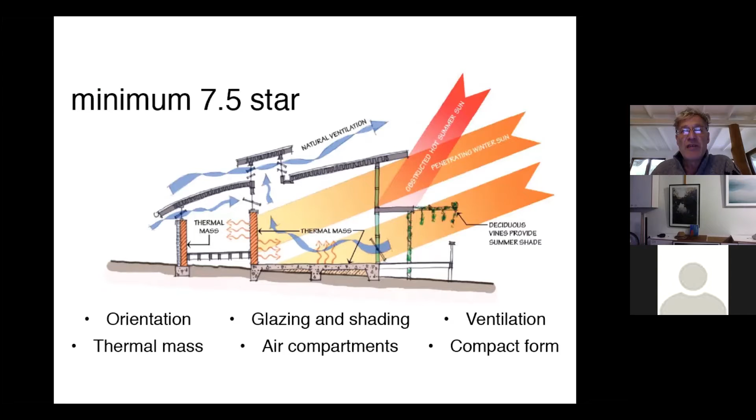If I just quickly take you back to that scale, you could see, so if you're targeting 7.5, you're going down 1.5, it nearly doubles the energy used in a year to heat and cool a home.

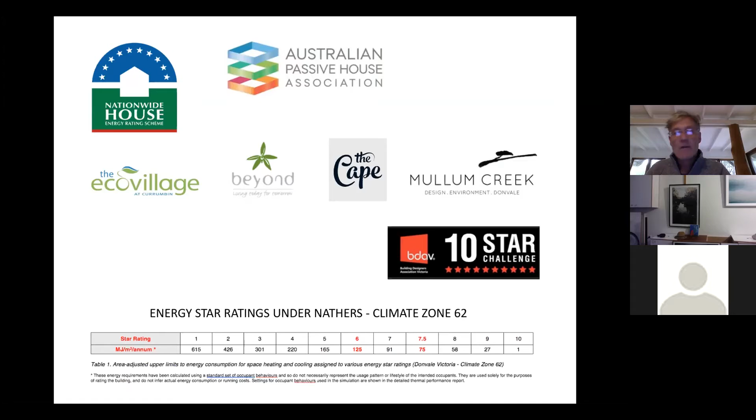So this weakness in the system can be addressed with a few relatively simple measures, which we employed for the Mullum Creek Eco Housing Project in Donvale, which is an outer suburb of Melbourne. We required that energy ratings to 7.5 star be undertaken using AccuRate, and that be done by one nominated independent rigorous assessor for all homes across the estate that the developer nominated.

And once construction was underway, we provided lot owners with a free inspection service to ensure that the thermal performance that was designed into the home was actually carried through to the final constructed outcome. Both energy assessments and construction overview were generously funded by the developer, which is a family of environmental philanthropists, Sue, Steve, and Danny Matthews.

In cool temperate climates like Melbourne, it's not actually that easy to achieve a genuine 7.5 star energy rating, which Stefan and many other terrific architects discovered. So that's the thermal performance that almost halves the space heating and cooling requirement attached to the nationally mandated 6-star minimum. We found that homes with anything other than compact architectural form and a modest amount of well-oriented glazing struggled to reach 7.5 star without all of the following design features in place.

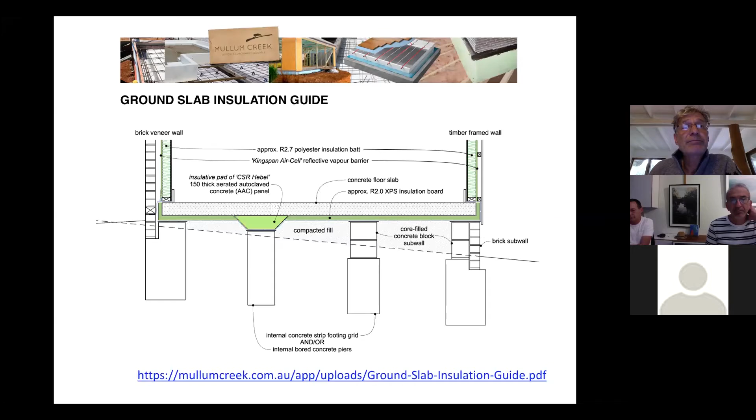As architects who declare, I suggest we focus on securing as-built, say, 7.5, 8-star homes. We should do that by teaming up with highly competent energy assessors who we beg to consult without fear or favour through the design, certification and construction phases of our projects. Better that than to cajole them towards a good look but low bang for buck and frankly unnecessary 10-star standard or target. Our energy assessors also need to be paid properly for the substantial work that goes into a truly rigorous service. Okay, so what about building materials, which is what I'm supposed to be talking about?

A report was tabled at the World Economic Forum in Davos in 2018, and it put the world's consumption of materials at above 100 billion tonnes a year, and that quadrupled since 1970, whilst population in that period only doubled. So between 2016 and 2018, just 2 years, this consumption had jumped by more than 8%, yet the reuse of materials had fallen from 9.1 to 8.6%. According to the CEO of Circle Economy, Harald Friedl, who tabled the report, "We risk global disaster if we continue to treat the world's resources as if they were unlimited."

Now, the lion's share of these materials, nearly 40%, is turned into housing alone, of all the materials that we draw from the planet. So the World Green Building Council also tells us of all global carbon emissions that are attributable to the built environment, 28% are embodied mainly in the procurement of materials used to construct them.

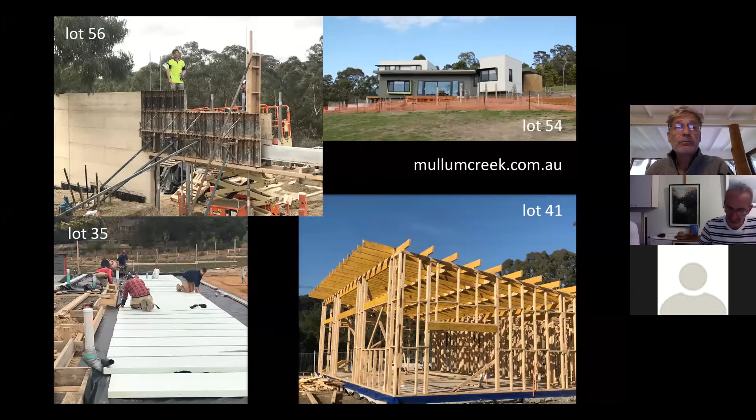But in this emergency, we could instead respond to a simple truth, and that's that the cement and concrete products, the steel, the fired clay products, the timber, and the swimming pools we discovered are currently the most impacting materials to be locked into our builds as they rise from the ground. A couple of thumbnail sums and a good dose of critical and future thinking go a long way in guiding our material specifications towards environmental and social responsibility.

So let's start with cement and concrete. The World Green Building Council, Beyond Zero Emissions, and other respectable sources agree that the manufacture of Portland cement alone, not all of concrete, just the cement that goes in, accounts for a whopping 8% of the planet's greenhouse gas emissions. So that's roughly the same as the entire transport sector. It's hard to believe, but it's true.

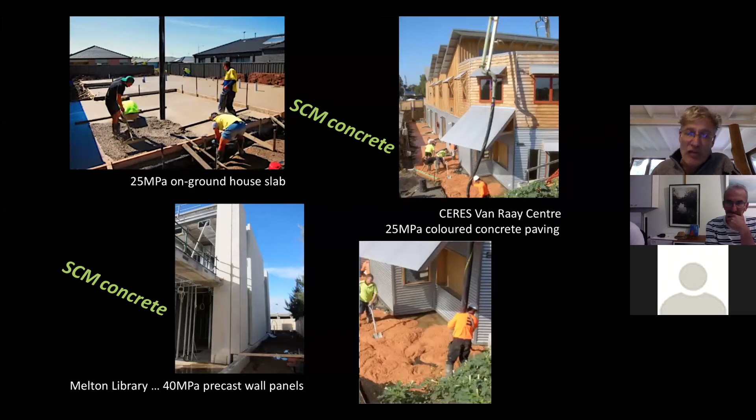But there are alternative, equally effective and readily available concrete binders, such as fly ash, which is a waste from coal-fired power generation, and slag, which is a byproduct from steel smelting. They're alternative binders, and they're collectively referred to as supplementary cementitious materials, or SCMs.

The Mullum Creek Design Guidelines required that SCMs make up a minimum 30% of the cement used in wet mix structural concrete. And some architects and engineers choose to increase that to around 60% where surface finish isn't critical. As construction commenced on the estate at Mullum Creek, we found that more and more local batching plants were supplying concrete with SCMs, with no increase to supply cost. In time, it should be considerably cheaper, we're told by these batchers, because slag and fly ash are problematic industrial wastes that are otherwise expensive to dispose of.

The initial resistance to SCMs subsided as concreters at Mullum Creek found ground slabs containing SCMs were stronger and with less shrinkage cracking, as the shotcrete sprayers learned not to add water so liberally to adjust the workability of the SCM mix on site, and as bricklayers and rammed earth wall contractors realised that bagged cement containing 50% SCM, such as Australian Builders Eco Blend, which is on the left of your screen, was equivalent to general purpose Portland cement in both performance and price.

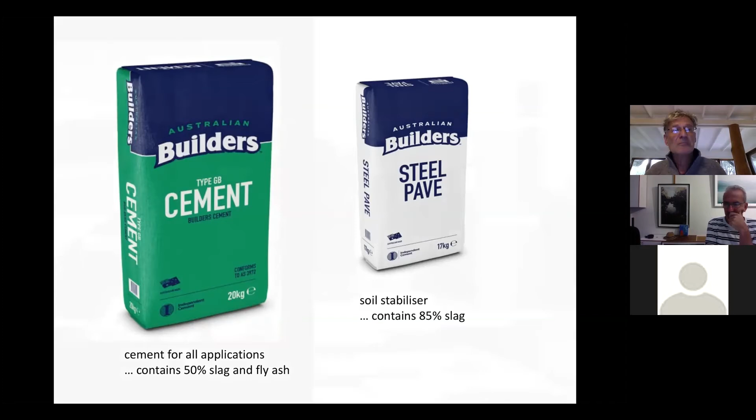The other week, I was on the phone with a bright young architect from Stefan's office. His name is Rodrigo Roca. He recalled someone, I think from Austria, telling him that rammed earth in Australia is not rammed earth, but rather just dirty concrete.

And he's right. There's certainly nothing environmentally responsible about building a 350mm thick rammed earth wall containing 10% Portland cement by volume. The mix for a 190mm thick hollow concrete block contains only 14% Portland cement, and the volume of material going into that wall is hugely less, so much less impacting than most of the rammed earth walls that are going up at the moment.

When I was a young bloke, we built a lot with rammed earth and puddled mud. We put effort into selecting and blending aggregate with the right gradation of particle size and colloidal content to achieve good strength and weatherability without the need for cement.

We followed the CSIRO National Building Technology Centre Bulletin 5 on earth wall construction, which is still not in print, but you can find it on the net. And we did the old-fashioned thing of erecting test panels before proceeding with each build.

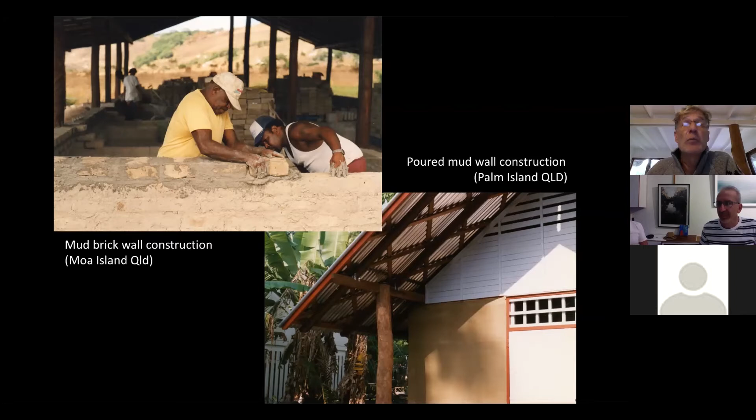What about steel? I think there's nothing wrong with a piece of corrugated iron. Profiled sheet steel for wall and roof cladding provides an expanse of robust and almost maintenance-free cover that's difficult to surpass at less than half a millimetre of material thickness.

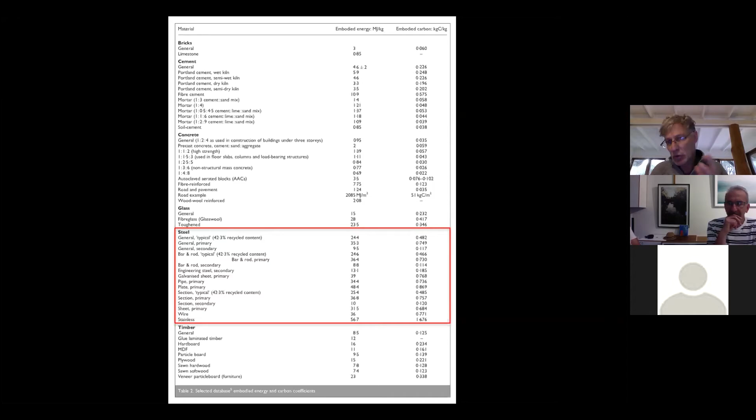You'll see steel is up around in excess of 10 times per unit weight. They have a similar density, but you'll see by per unit weight or volume, 10 times the embodied carbon and embodied energy that go into them. It's quite extraordinary.

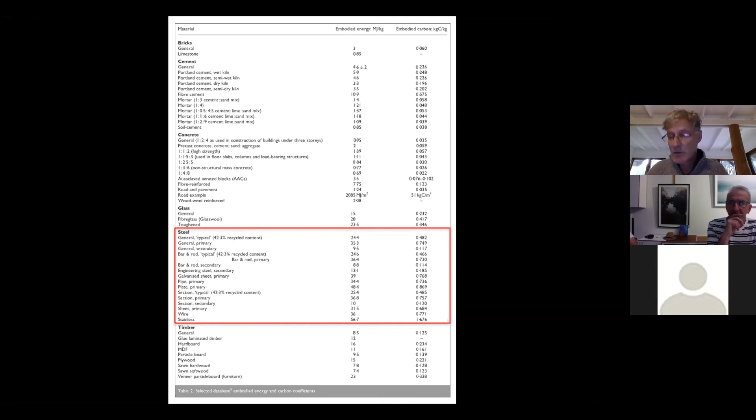In too many simple structures that I see, around the traps, I find there's steel used where substitution with a sustainably sourced timber would have been a cost-saving no-brainer. On some sites, it's almost obscene. These are architect-designed homes.

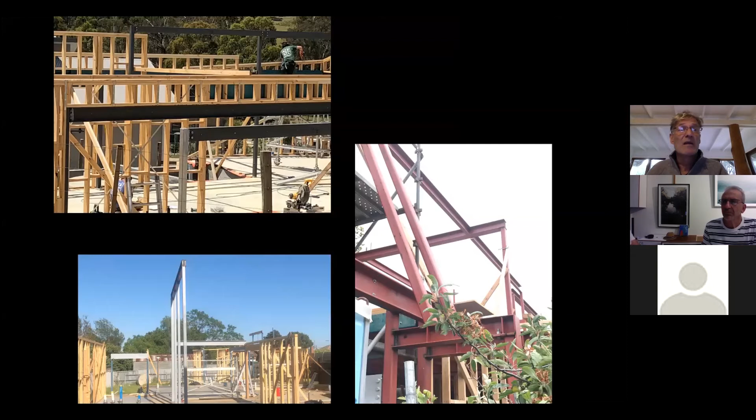The Mullum Creek Design Guidelines include a requirement that prohibits the use of cold-form steel framing, but the use of hot-rolled steel is permitted. I learned more recently, some years after we finalised the design guidelines for Mullum Creek, that the Currumbin Eco Village up in Queensland prohibited hot-rolled steel, and it did so without undue resistance. So in retrospect, I reckon we could have done this too.

Nonetheless, the Mullum Creek Steel Products Guide, which you can find on the Mullum Creek website, lists steel products that are manufactured locally via comparatively energy efficient ISO accredited processes. Our local eco-warrior, Joost Bakker, argues that steel is fully recyclable and so the ultimate framing timber.

When the day comes that global industry draws solely on recycled steel stock and renewable energy for its resmelting, I might look to agreeing with him. But until then, and it looks to me to be a long way off, this climate and biodiversity emergency must have us desperately seeking to minimise the amount of structural steel we shove into our buildings.

While working through some details for a reinforced concrete raft slab a while back, I did a few simple sums and I realised that its embodied carbon could be reduced by increasing slab thickness to allow a reduction in the gauge of slab mesh. And you'd think that to be counterintuitive, but such is the potency of embodied carbon in steel that we need to address.

We need to start questioning architecture on our drawing boards that relies on highly reinforced concrete and hot-rolled steel to stand up. We need to ask ourselves why such structurally demanding designs are necessary. Are we chasing building heights that are simply unsustainable, also by broader environmental and economic and social measure?

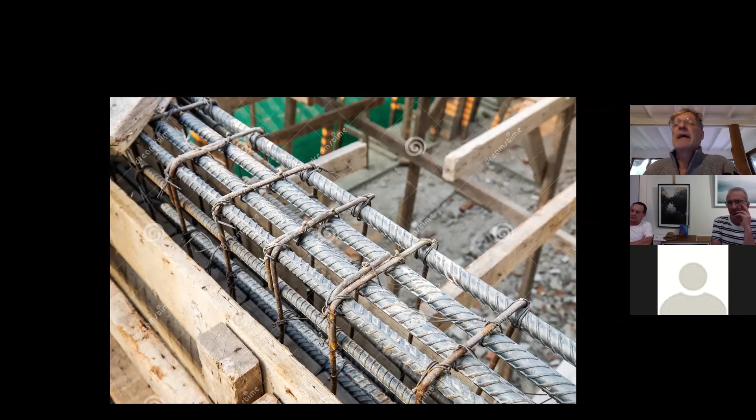Or has our architectural flair for gravity-defying cantilevers overtaken our responsibility to design light and lean in response to the emergency before us? What other less impacting materials could we use for these structures?

And that brings me to timber. You'll see this everywhere. Wood is good, end of story. Make it wood. Contrary to popular belief and some heavy marketing, timber can be the very best or the very worst material you will work with as an architect or a builder, depending on where and how it's sourced.

If it's sourced sensitively, it can store carbon through and beyond its service life in construction. It can be reused or recycled, or it can be harvested from deliberately planted and sensitively managed forest, helping to maintain healthy ecological processes, sequestering atmospheric carbon, and contributing to the social and economic well-being of rural communities.

But timber that's harvested insensitively can result in serious and irreversible impacts on flora and fauna, on soil health and waterways. It can reduce or even reverse a forest system's sequestration of atmospheric carbon, and it can erode the well-being of rural communities. There's lots you can read on this.

Even before our current bushfires commenced in September, deforestation was responsible for some 17% of global greenhouse gas emissions. And unfortunately, the bulk of structural and architectural timbers that we specify in Australia are sourced in ways that contribute directly and indirectly to this forest demise.

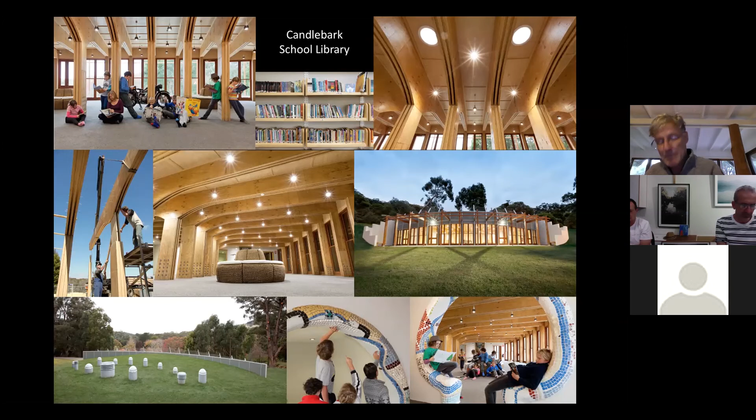The past 4 years, we've been able to extend the timber initiative of Mullum Creek into the launch of a new social enterprise called Ceres Fairwood. The profits from Ceres Fairwood go back into Ceres Community Environment Park, which people from Melbourne and the women on this webinar will probably know. It's a wonderful place in Brunswick.

Fairwood removes itself from the adversarial forest debate and from opaque environmental certification schemes. It aggregates and retails timbers inside short supply chains with tree farmers and portable sawmill operators who we know personally. They're mostly small producers who are geographically dispersed and struggle to find, sell and deliver to a market that fully appreciates the trees and the timber that we've got on offer.

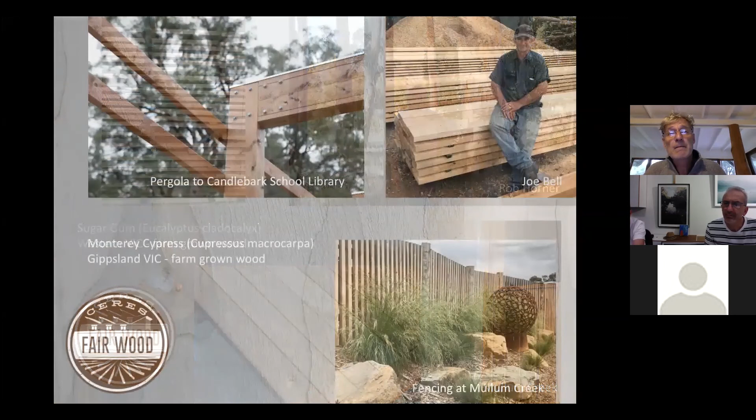Fairwood buys only from growers and millers who source wood to the highest standards of environmental and social responsibility, being informed by the Mullum Creek project. We share their stories directly with our customers, which are building and landscape contractors, furniture makers and DIYers. Fairwood builds direct friendships and understandings between city and country folk, and it encourages farming families to revegetate their bare paddocks with trees for conservation and for profit.

I'm in the process of writing a paper on timber for the AIA's Environment Design Guide, and once that's done, I'd be happy to present again to Architects Declare on this subject of timber.

For me, the only really disappointing thing about the Mullum Creek project was our failure to cap the scale of homes that were built there. There are some monster houses on the estate, and the peri-urban surrounds didn't exactly provide commercial courage for such a move, because there are lots of other big houses surrounding the estate.

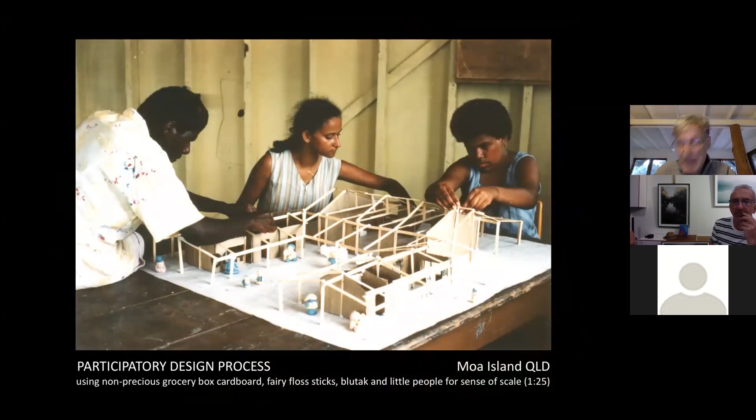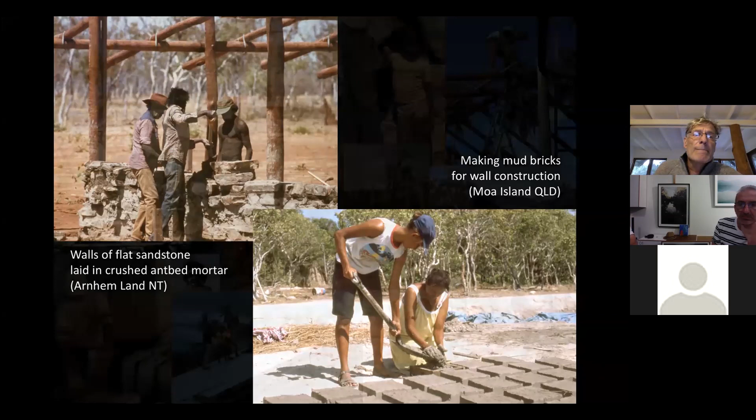This background brought me the courage to take a sidestep upon graduating as an architect, to live and work with rural and remote Aboriginal and Torres Strait Islander communities in support of their aims, to design their own homes in ways that were meaningful to them, to build their own homes using materials which were freely available in the local bush, and to adopt simple construction methods which were suited to the community workforce, which were men, women and children, all with vastly different levels of skill and energy.

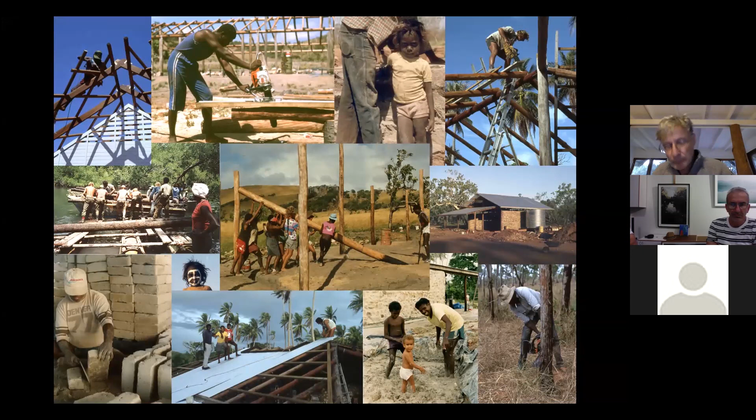Back in Victoria a decade later, I was able to follow my dreams. To reforest a degraded paddock in South Gippsland, to build an autonomous house in my spare time as I found the dosh to do it, to team up with neighbouring farmers and supporters from both the city and the bush to reforest our local valleys between Western Port Bay and the Bass Coast. We were able to plant 400,000 locally Indigenous trees and shrubs within a decade. That's what people power can do.

I was able to follow in my grandpa's footsteps and grow fruit and veggies for my family, our friends, and for organic retailers, CERES Fair Food, another social enterprise of CERES, and to Terra Madre. This place, and it's where I am now, it'll always be my laboratory for learning, and it'll be a lifelong joy. So to you young ones Zooming with us, I'd like to assure you that there are lots of fun ways to be an architect.

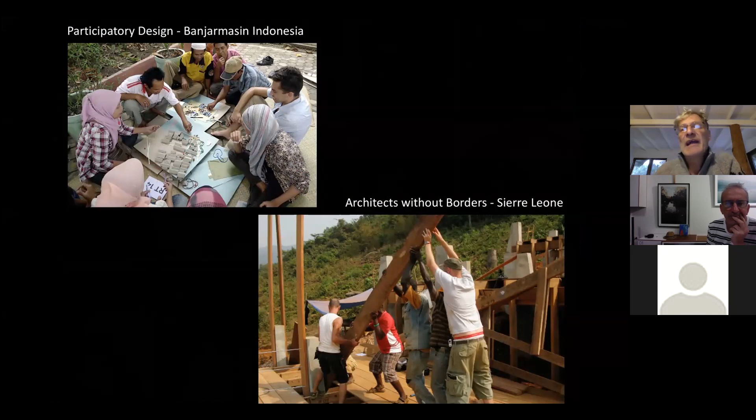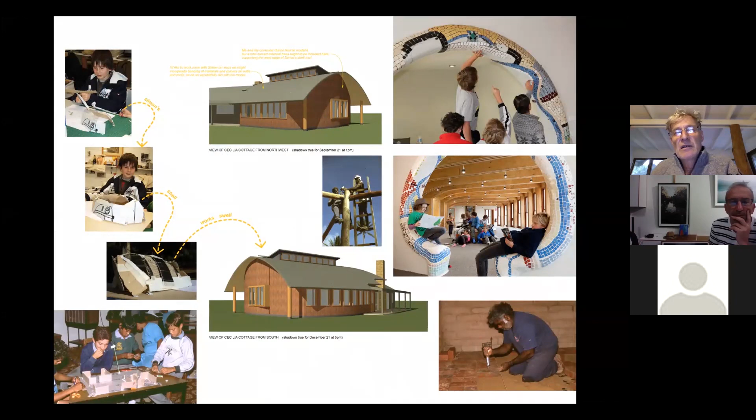This suite of crises that we have in front can serve us up as many opportunities as constraints. We can skill up to this emergency most effectively by collaborating generously, not only within our profession, but also with absolutely anyone and everyone who's willing to play with us. Include our building user groups as central players in participatory design and construction processes. Let's influence and inform new aesthetic sensibilities that have us vomiting at the sight of wasteful opulence and excessive scale. Let's see us celebrate proud self-builders and that leave us in awe of creativity that can be born of hardship.

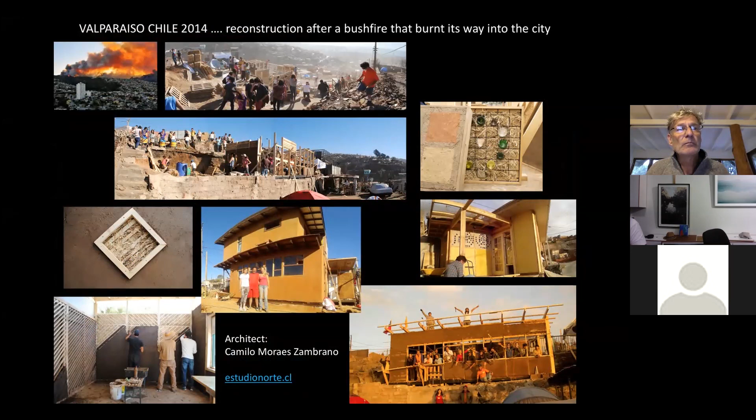We could even suggest that a green building is one that's already there. Together, let's delicately rework existing buildings where we can, apply our finest design skills to minimise natural resource depletion and to give our planet a chance to heal. Accept that a gentle architectural approach may not catch the eye of yesterday's, maybe tomorrow's glossy magazines, but know that future life on Earth will be thankful for it. So now might be the time for a revolution in architecture.